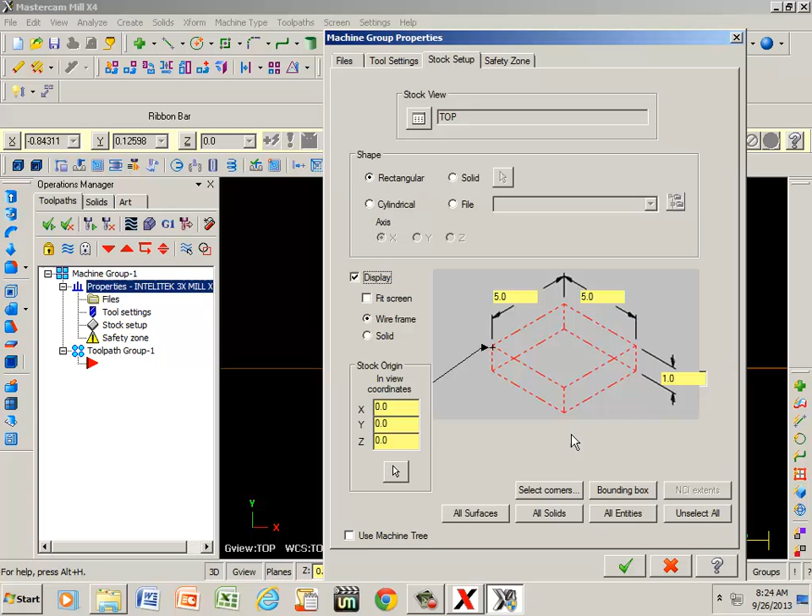And this is what they call the operations manager, and this is where I can select my stock material or stock setup. I'm going to make a 5 by 5 by 1 inch thick. So if I just type in 5 tab, 5 tab, and 1 tab, notice that my origin or place of reference is in the center. So if I click here, I'm going to be machining off the bottom left corner, or programming from the bottom left corner. Now I want to click on display and green check.

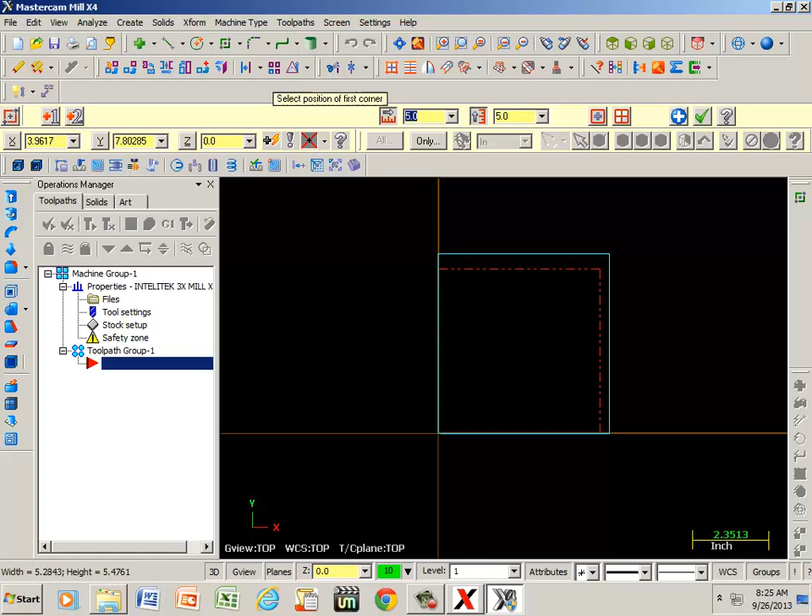Now if I take the roller on my mouse and roll it back toward me, I can center my material in the center of the screen. I'm going to go to create and click on rectangle. Now if I get close to the bottom left corner, watch what happens. It's going to snap right to it. Bam. There it is. If I take the left mouse button and hold it down and create a window larger than the red dotted line and click it one time. Now here is my width or my x-axis, and here's my height or my y-axis. Let's type in 5, tab over, 5 again, tab, blue apply, green check.

Okay, what I want to do is I'm going to create a pocket. So the easiest way for me to do that, I want it to be 3/4 of an inch away from all edges. So if I go to create, line, and parallel, right here I can type in 0.75. And if I click this button here, my distance button, it's going to turn it red. That locks me in. So now if I click this line and go to the inside, do it the same way all the way around. Blue apply, green check.

Now I need to go ahead and trim off this excess here. So if I go to my scissors, here's various options I have. I'm going to select this one, divide and delete. So once I click that, I'm going to zoom in with the roller, and you see the dotted lines here. If I click here now, it goes away. There. Green check.

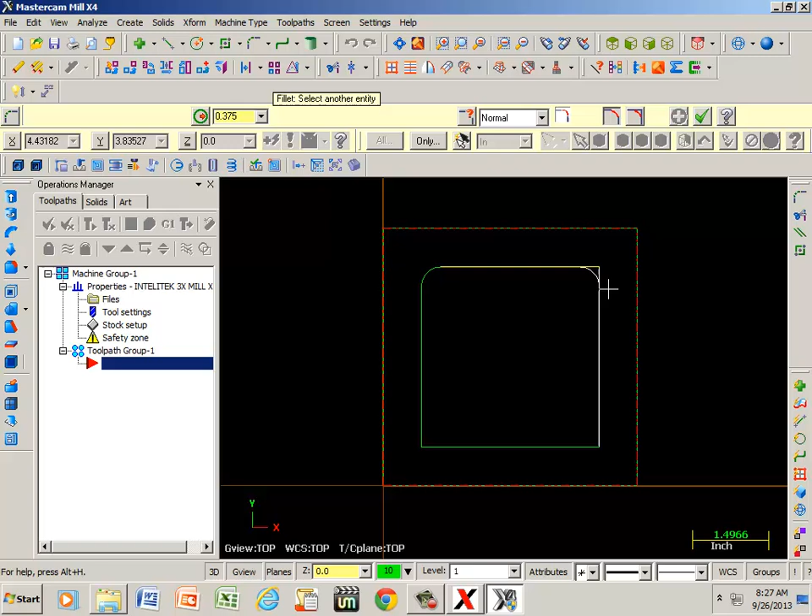Now notice I have right angles or square corners. So if I'm going to machine with the cutter, it's going to leave a radius. So I need to create a radius in these corners. You do that by going to fillet entities. If you ever hover over anything in Mastercam, it will tell you what it is or what it does for you. This one is called fillet entities. So if I click that, it defaults at 1/4 of an inch. Well, I want these radiuses to be 3/8 radiuses. So if I click here and type in 0.375, I click this button here. Now if I click this line and I go to this line, it creates the radiuses for me. There. Blue apply, green check.

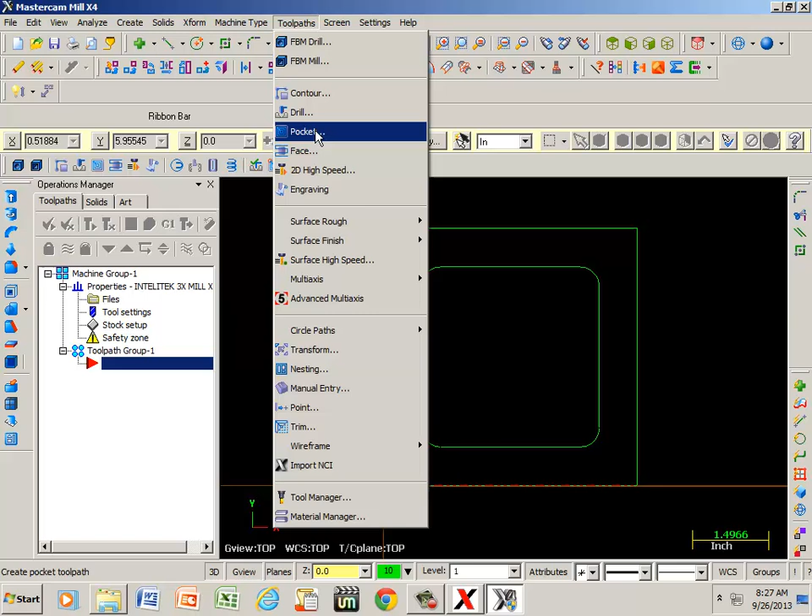Alright, now I need to go to tool paths. I need to pick a tool to machine this pocket out. So if I go to tool paths, scroll down until I get to pocket, and I'm going to name this pocket. That's my operation. Now if I click this line, notice it turned it yellow. That means everything's connected. Green OK. And I need to pick a tool.

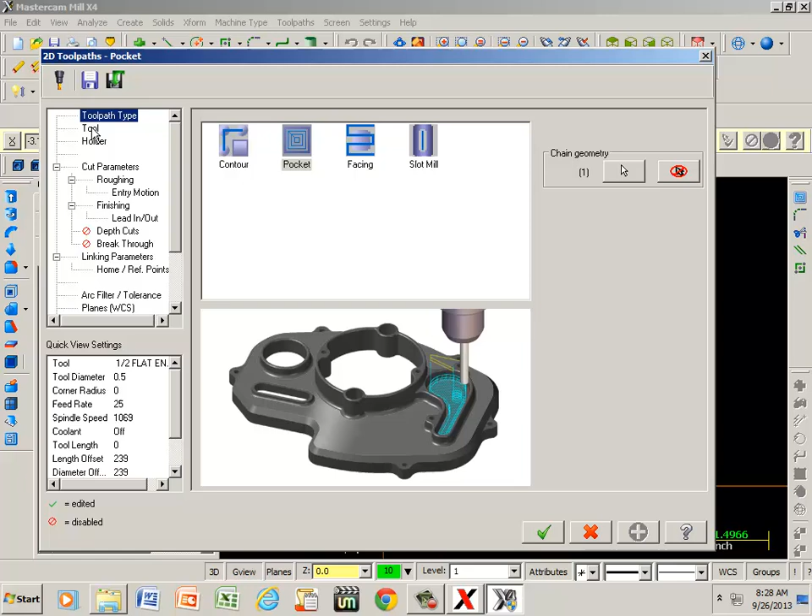Well, since that's a 3/8 radius here, the largest cutter that I could possibly use would be a 3/4 of an inch or 0.75. So if I go to select library tool, here's my 3/4 flat. I'm going to double click that, and it's showing tool number 241. Well, I don't have 241 tools in my carousel on the CNC machine, so I know that my 3/4 cutter is tool number 7. So if I double click this, I can change that number.

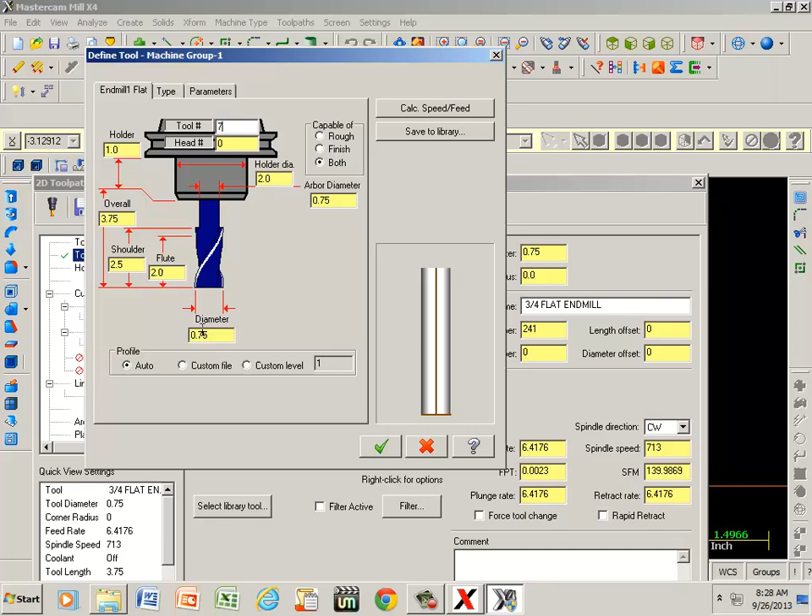Notice that we have 3/4 of an inch here. So we're still using a 3/4 cutter, but I renamed it tool number 7. We go to cut parameters, showing that we're climb milling, which is what I want. We are roughing, and I can pick whatever style I want.

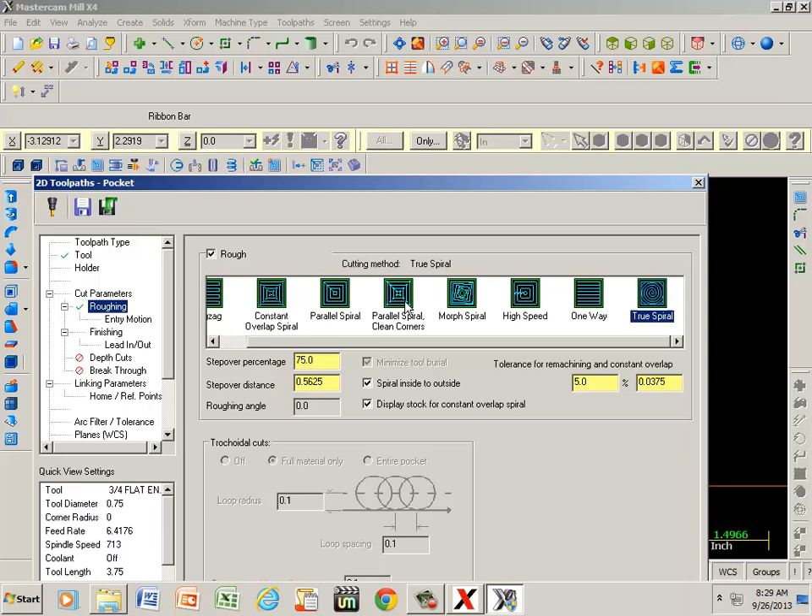The fastest way of machining a pocket would be to go to true spiral. So if I click on that, and I go to finishing, actually entry motion, here's helix and ramp. Helix is going to zigzag back and forth until it gets down to my depth of cut. Ramp goes 2 or 3 axes at the same time, simultaneously. As the Z is coming down, it's moving also in my X and my Y, or one of the other.

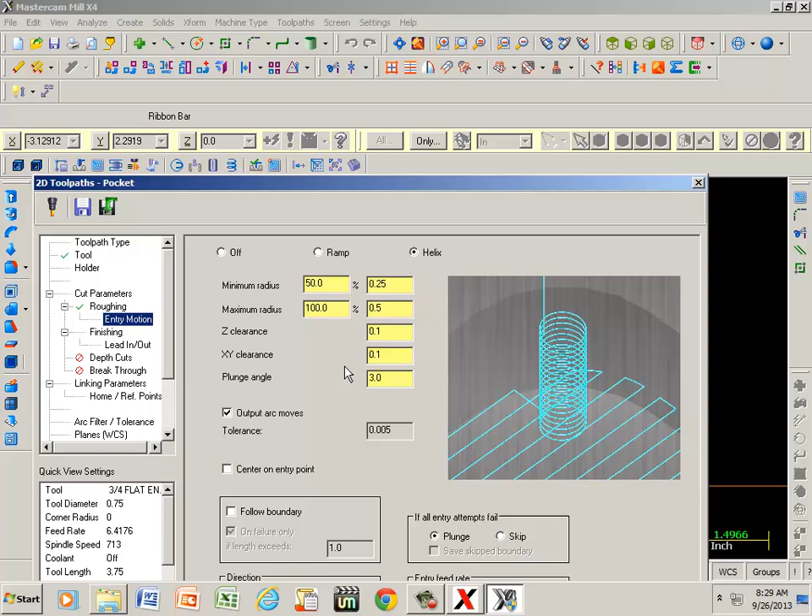Finishing is going to leave one pass, and it's going to save me 10 thousandths worth of material for cleanup. I can change that if I want to. I can change that to 50 thousandths or 2 passes at 25 or whatever.

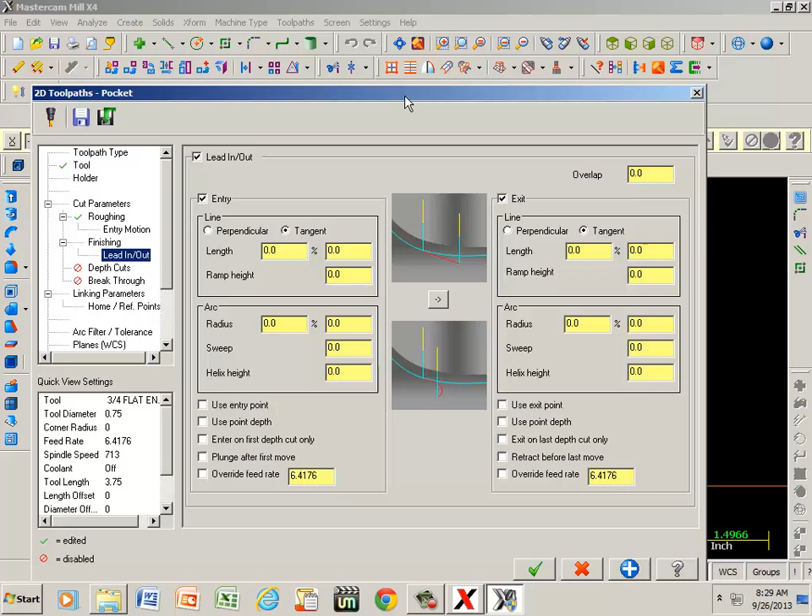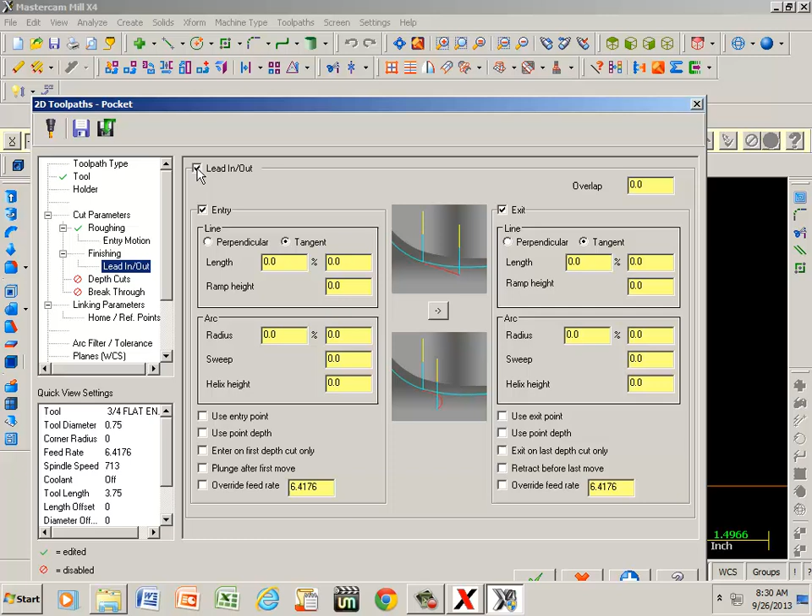Lead in, lead out. What that means is, as the tool is coming in, it leads in, it machines all the way around your pocket, and then it leads out, it goes down another 100 thousandths or whatever you want to take it. Leads in, goes around, and leads back out. I'm not going to use that, so I'm going to uncheck it. It grays everything out now.

Depth of cuts. I'm going to click that and tell it I want to go 100 thousandths per cut, 0.1, or I can give it more zeros if I want to. That's not going to change the value of that number. I'm not going to break through. I want to leave a pocket in there, so that's not even going to be an option.

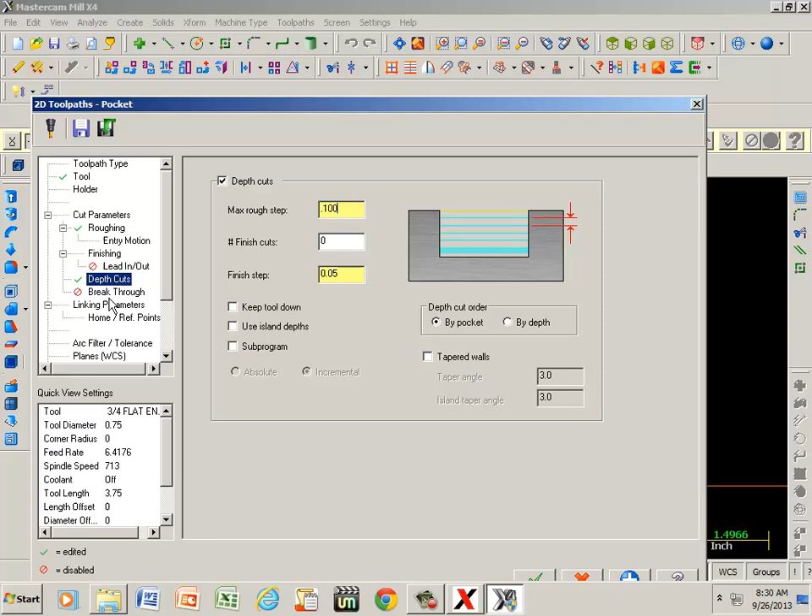Linking parameters, that's going to give me my total depth. Okay, we said that that's going to be 1 inch thick. I'm going to machine this 3/4 of an inch deep. So that's going to be minus 0.75. If I want to turn some coolant on, I can go ahead and click on coolant and click on flood and turn that on. Well, everything's done. So I hit blue apply, green check.

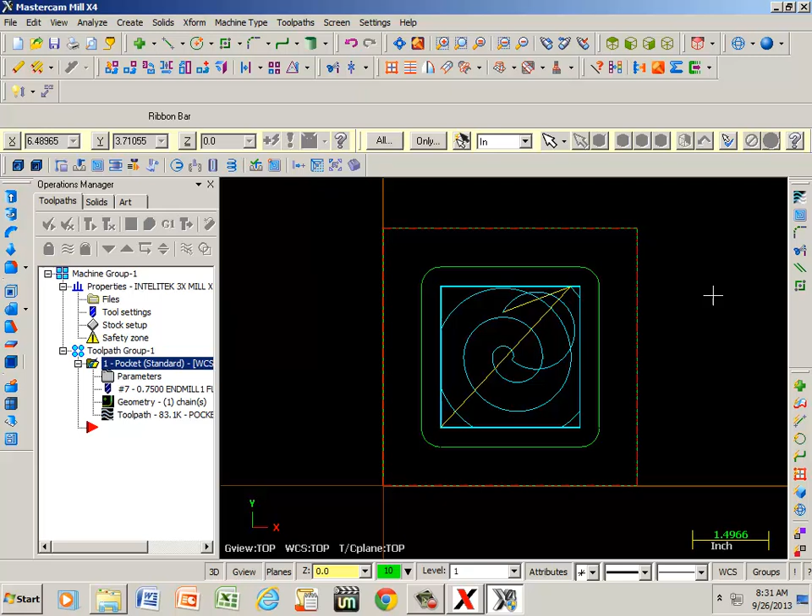Here's my tool path. A lot of times that gets in your way, so you can hide it, and you can do that by hitting Alt-T on your keyboard. One time shows me where it's going to start and machine around. One more time will hide it. Let's go to an isometric view. If I hit Alt F1, that's 100% zoomed in. I'm going to back off of it 25% by hitting Alt F2.

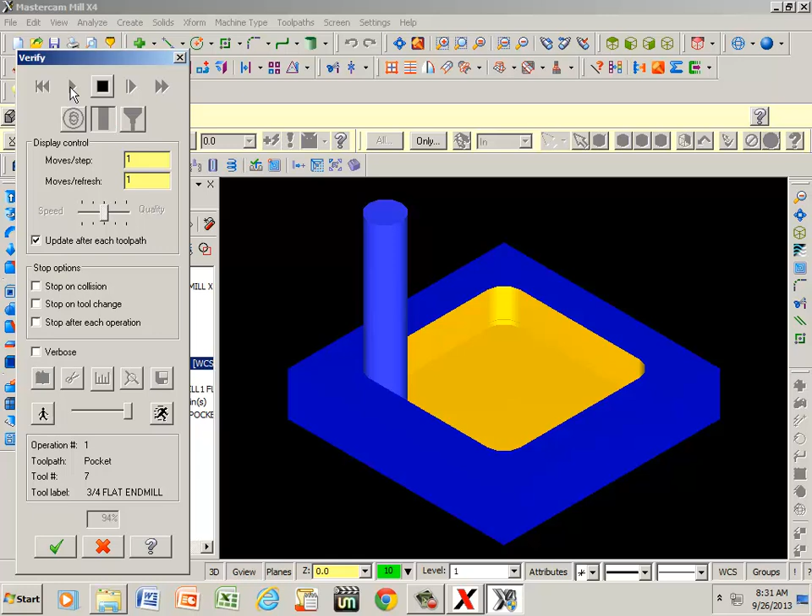Now here I can hit my verification and machine. If I hit right mouse, I can go to dynamic rotation and take a look at it, make sure I didn't break through, or zoom in and look at my radiuses, see what kind of finish I'm leaving. Everything looks good, so I'm going to hit green OK, and back to my isometric view.

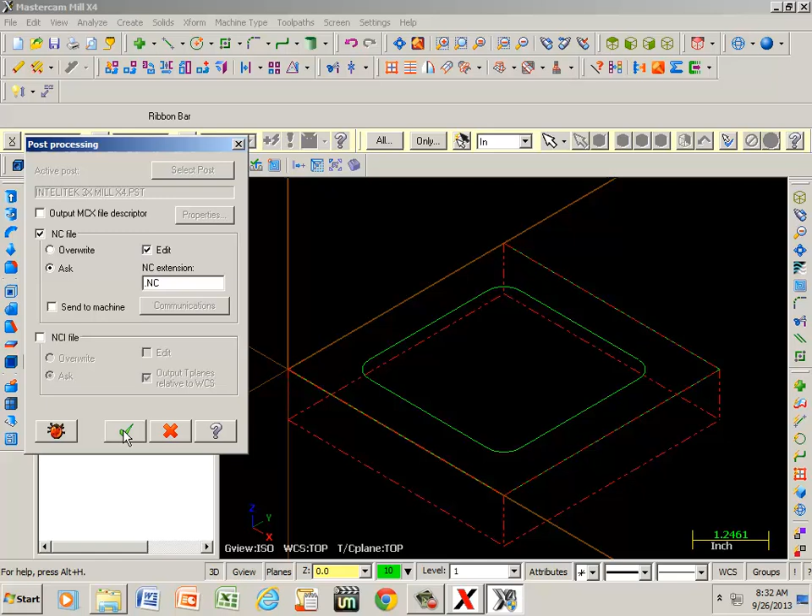And let's go ahead and generate code. So if I hit G1, green check, it wants to save it under an NC file. I can save it there, or I can save it to my desktop, or I can save it to a flash drive, or whatever I want. I can do that by going here. Here's a USB. I'm just going to save it under my documents. Actually, I think I'll just go ahead and leave it in NC and hit save.

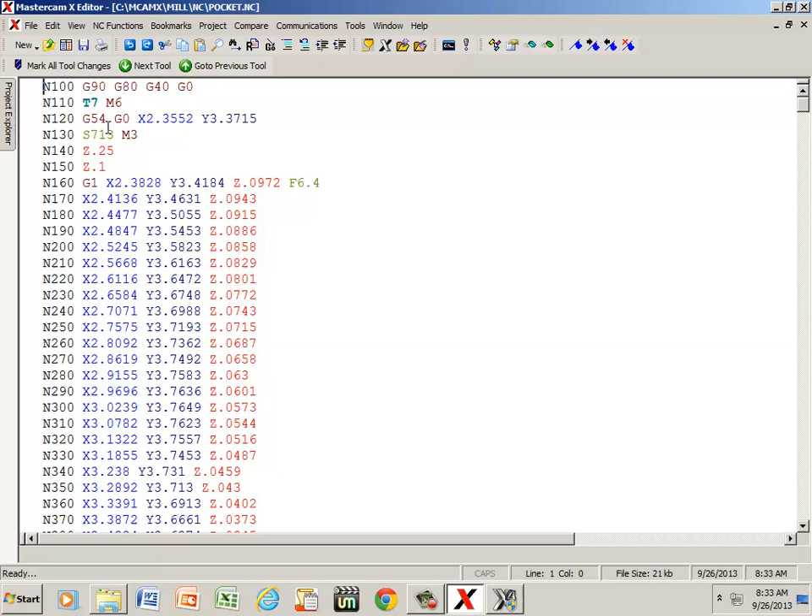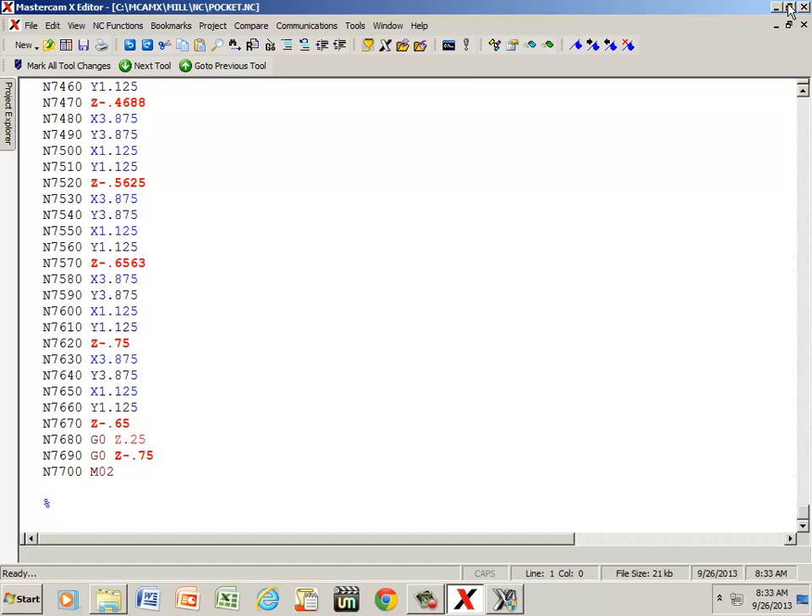Now here's the code. Starting off with G90, absolute programming, it's got various other codes that we will discuss later. Your G80, your G40, and G54, tool offsets, things of that nature. Scroll all the way down. M2 ends the program. Everything looks good. I'm just going to minimize this, and we will continue with another video after this one.